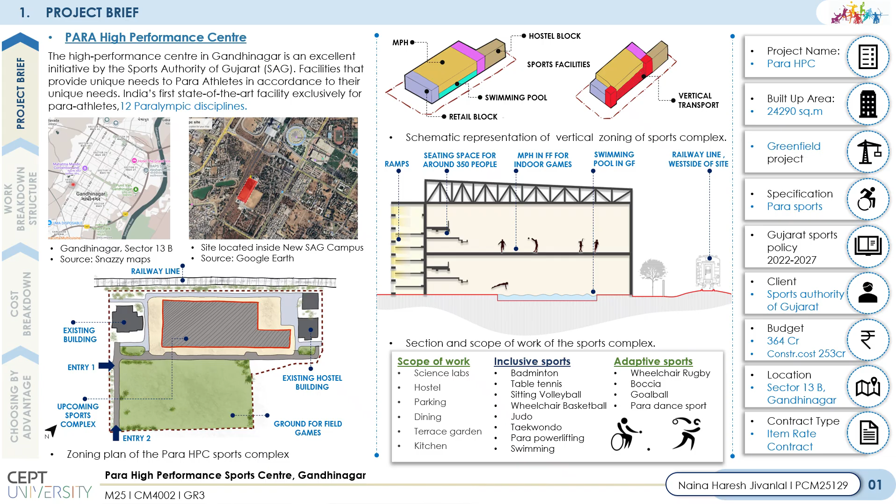The campus is designed to support inclusive and adaptive sports. Inclusive sport is suitable for both para athletes and normal athletes, and adaptive sport is specific for para athletes. The Paralympic disciplines also include indoor sports hall, aquatic facilities, rehabilitation, and sports science spaces. The main objective is to create a fully inclusive sports ecosystem.

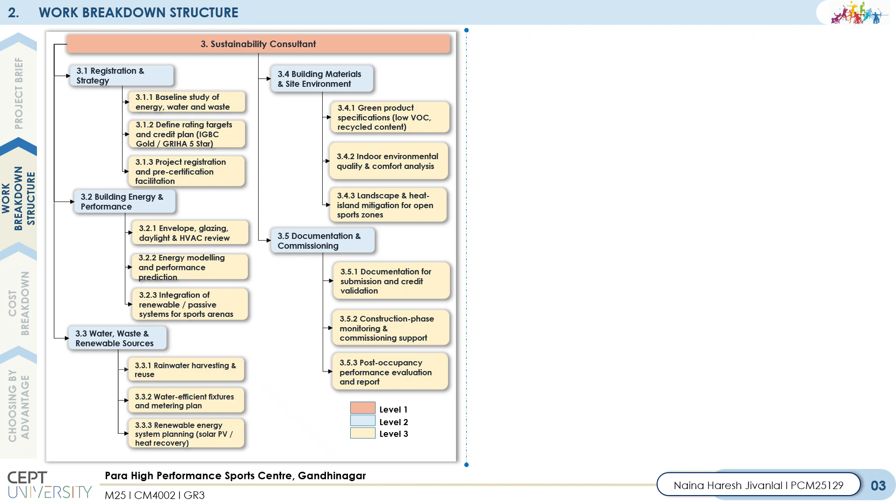In parallel, the sustainability consultant is responsible for conducting the baseline assessment for energy, water usage, and waste management, defining rating targets such as IGBC, GRIHA certification, performing energy modeling, integrating the renewable strategy, and preparing the sustainability documentation. Their involvement includes commissioning support and post-occupancy performance evaluation to ensure the targets are achieved.

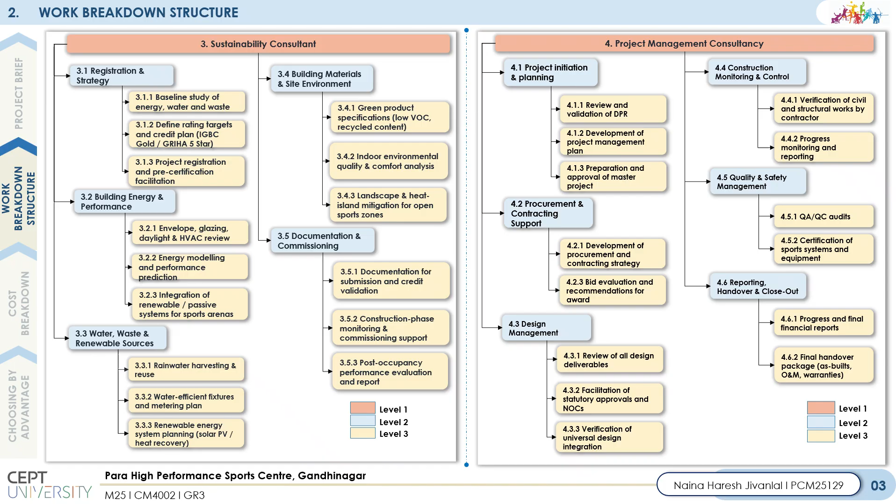The project management consultancy handles the overall project governance, beginning with the DPR review and validation, scheduling and procurement planning. During execution, the PMC manages construction monitoring, quality audits, safety checks, financial tracking and progress reporting. At the project closeout phase, they coordinate the final documentation, as-built submission, and operational handover process. Together, these consultants maintain strong control on environmental performance, time, cost, and quality management of the project.

Next, the construction firm's scope begins with site mobilization and setup activities, including the construction office, labor camp, and batching plants. Execution includes basement construction, foundation works, tower structures, hostel blocks, sports training halls, sports science facilities, ramps, spectator seating, and internal service areas. The project also involves comprehensive external development works, including roads, parking systems, landscaping, water supply lines, drainage systems, substations, and utility networks. The phase includes quality checks, testing, commissioning, and the handover of the facilities.

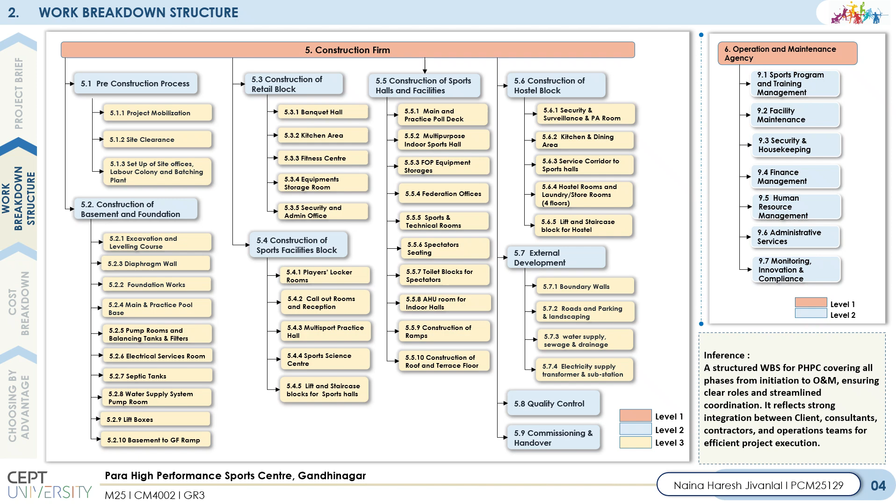Moving to the cost breakdown structure, the total capital cost of the project is around 364 crore, and the overall value including O&M expenditure reaches approximately 401.8 crore. The highest allocation is toward the construction work, which is 253 crore, followed by the procurement cost, which is rupees 35 crore, and the operation and maintenance allocation is rupees 38 crore.

The consultancy services together account for about 47 crore, including the design, PMC consultancy, and sustainability consultancy. It also includes the related capex investment for sustainability. Additional financial provisions include the GST charges, and contingency is reserved for project risk management. For the total cost of the client's responsibility, around 65% of the total budget is directed toward execution, and 27% is allocated to design, ensuring strong technical preparation, support, and smooth delivery on site.

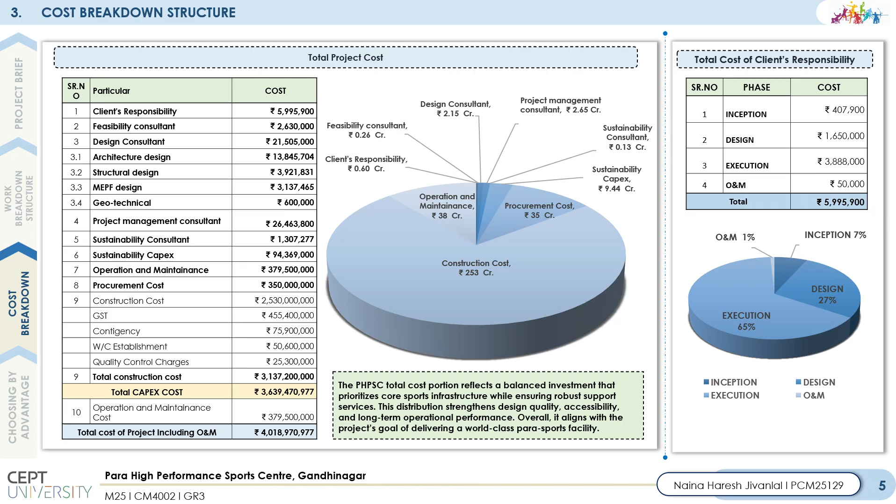Within the consultant cost, the design consultant fee of rupees 1.38 crore is distributed across the concept development, schematic planning, detailed design coordination, statutory approvals, specialist consultant integration, and construction support.

The sustainability consultant has a budget of approximately rupees 13 lakhs, covering the energy modeling, renewable planning, environmental documentation, and commissioning work. And the PMC fee of rupees 2.65 crore supports the project planning, procurement coordination, construction monitoring, quality and safety audits, financial reporting, and final handover management. This investment ensures strong technical quality control, regulatory compliance, and risk mitigation across the life cycle of the project.

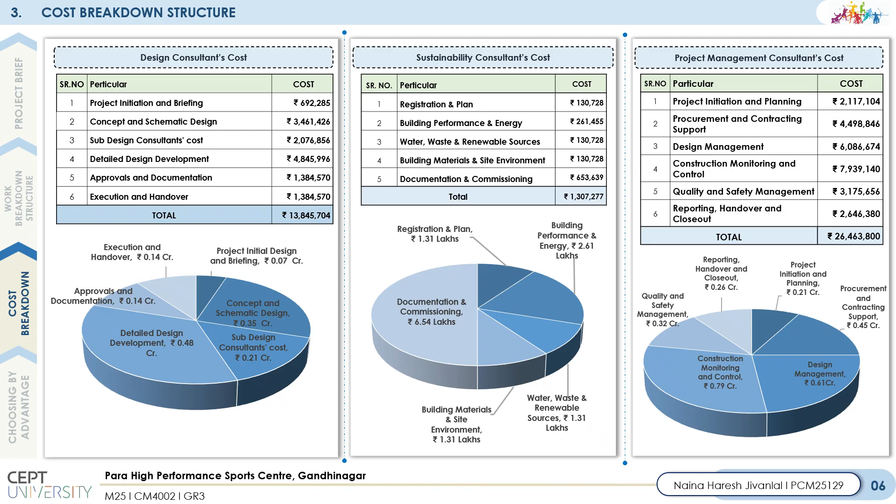Moving next to the construction and O&M cost. Within the construction package, the largest share, rupees 164 crore, is allocated to the sports hall and training facility, which include the major athlete activity spaces and competition zones.

Other major cost components include rupees 34.84 crore for the hostel block, rupees 27.09 crore for the retail block and supporting sport block, rupees 10.18 crore for the basement and foundation works, and external development work costs around rupees 5.77 crore.

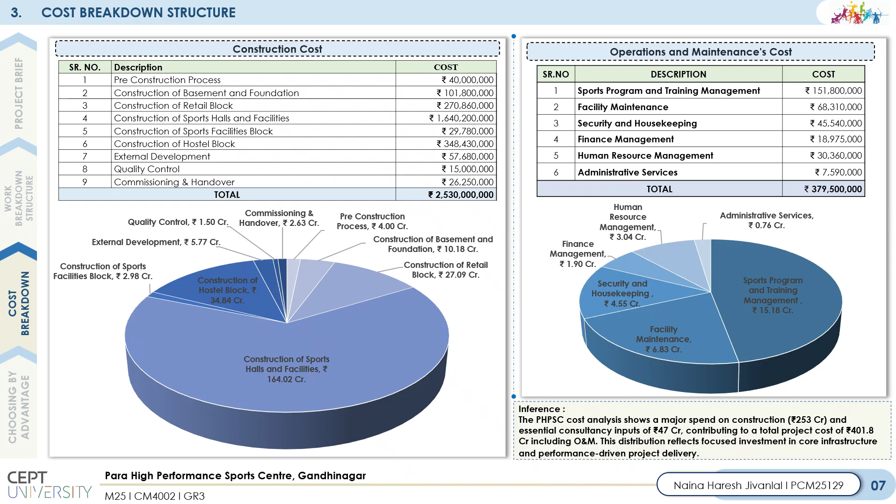Moving next to the O&M cost, it is overall 15% of the construction cost, which is rupees 38 crore. It's largely invested in sports program management, facility maintenance, security services, and administrative operations. And the other works are for ensuring the suitable day-to-day functioning of the entire campus.

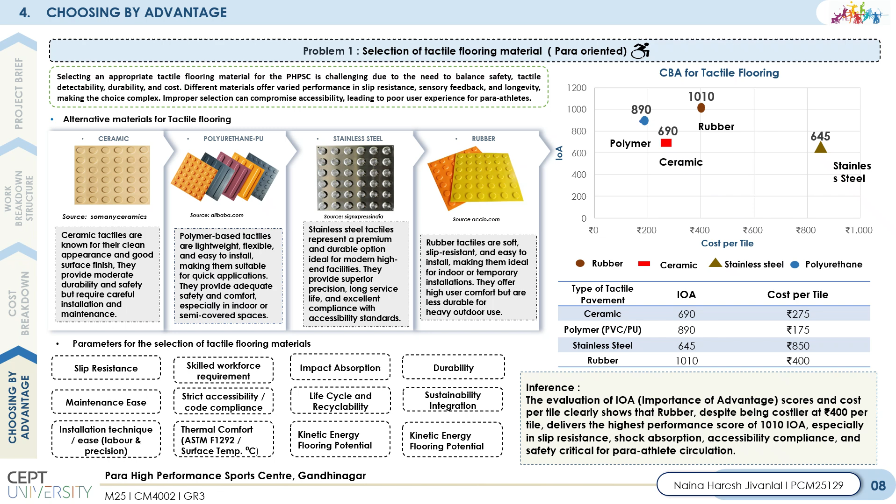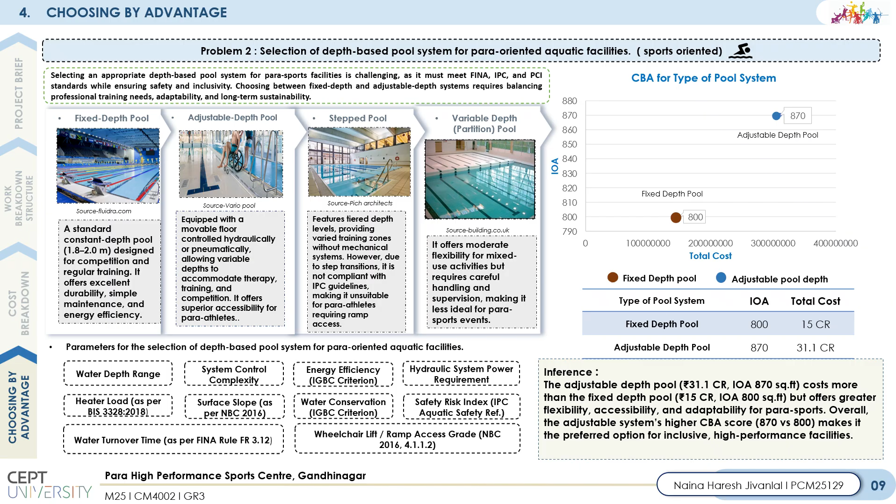After this comparison, the fixed depth pool scored an IOA of 800 at rupees 15 crore, and the adjustable depth pool scored a higher IOA of 870 at rupees 31.1 crore. Although the adjustable pool is more expensive, it provides better accessibility, flexible depth control for therapy and training, and overall safer use, making it the preferable choice for the para high performance sports center.

To conclude, the feasibility study of the para high performance sports center Gandhinagar used three main tools. The work breakdown structure helped clearly define the roles of the client, consultant, PMC, contractor, and O&M teams, from planning and design to construction and O&M, ensuring smooth collaboration and coordination throughout the project.

The cost breakdown structure shows that of the total capital cost of rupees 364 crore, the construction cost is rupees 253 crore, followed by procurement, O&M agencies, and consultancy services, which help maintain quality and compliance. The choosing by advantages analysis guided two key design choices. The rubber tactile flooring was selected with the highest IOA of 1010 for safer movement of athletes, and the adjustable depth pool system with an IOA of 870 was chosen for better accessibility and training flexibility.

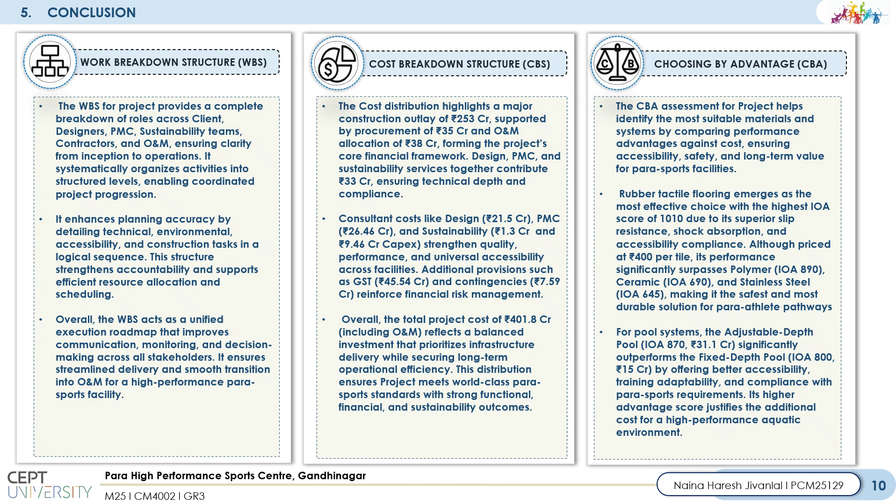Overall, the study confirms that the project is technically sound and financially balanced, and well suited for creating a safe, inclusive, and high performance sports facility for para athletes.